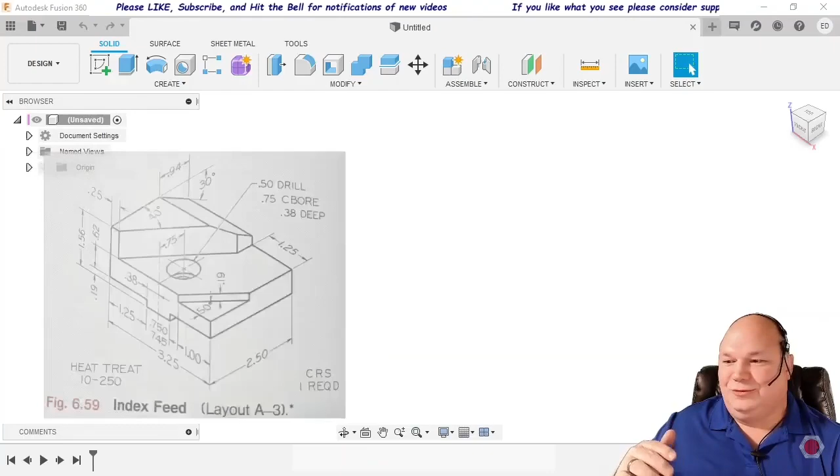And what we're going to do is we're going to make this faster. So rather than going through the items in my book in my original order, we're just going to go with Design Roulette. So, where she stops, nobody knows. We're going to ask Mo, give me a number from 1 to 10. 7. 7, okay. Make sure I've got my button ready to go.

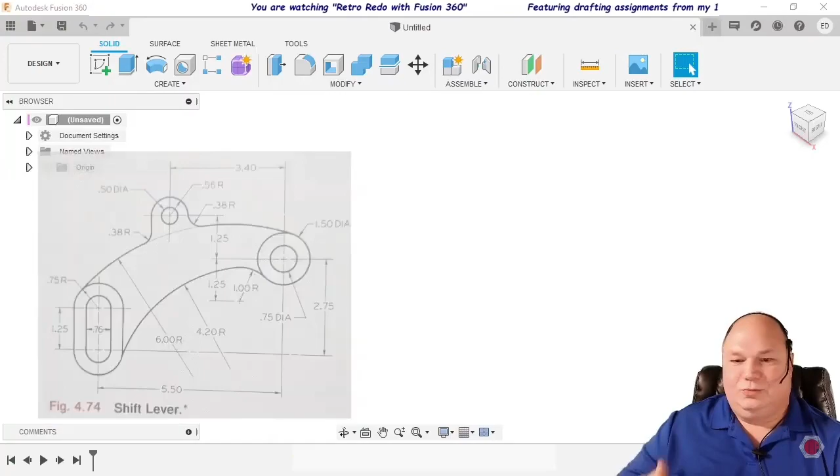As you may have already noticed, we've added the annunciation of the mouse buttons and the key presses down in the bottom of the screen for you. We can now see as we go. I use a lot of shortcut keys.

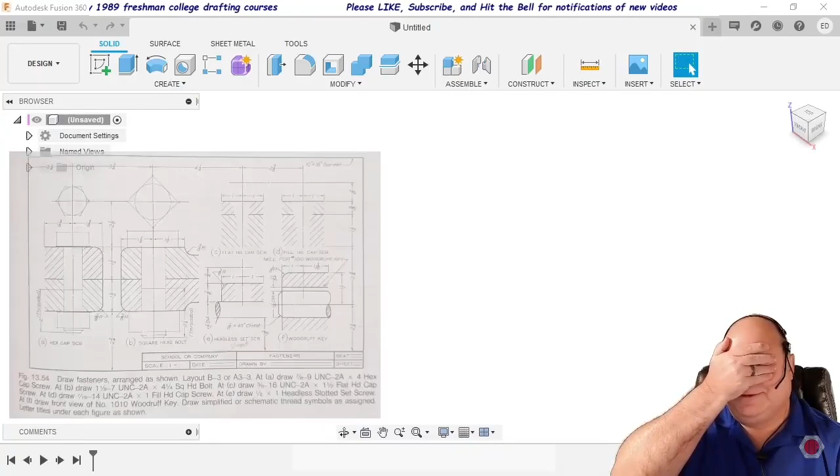Alright, here we go. Countdown 7, 6, 5, 4, 3, 2, 1. Stop it! Oh yay! Special bearing! Don't we love special bearing? Everybody loves special bearing. It's great. It's not actually. You'll see. It's actually fairly simplistic or straightforward.

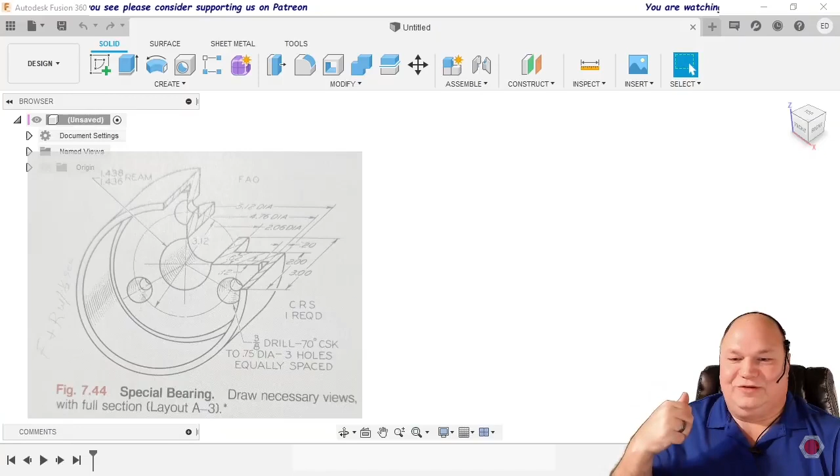Special bearing. This one is actually shown in a bit of a cross section, in what they would call a quarter section. What it allows us to do is actually just run everything off of the center line. So the first thing we want to do is, of course, save our drawing. Now we actually have some names, and this is bearing.

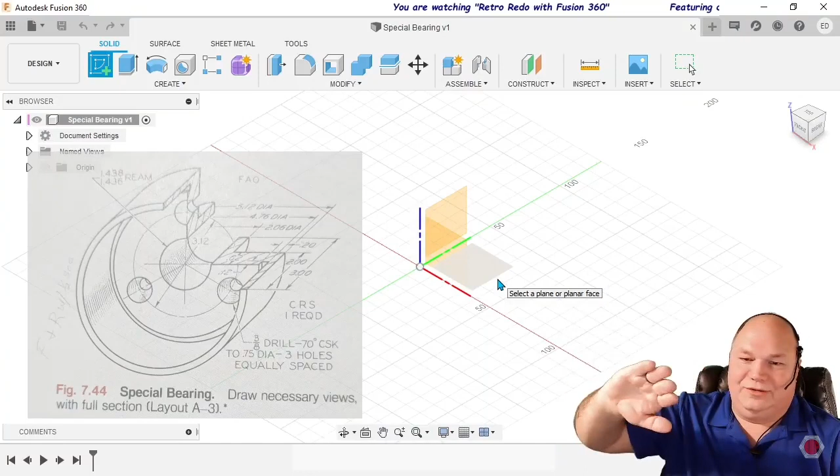And it is going to start, as all of them do, pretty much with a sketch. But I'm going to basically try and duplicate this profile here on this plane, and then just revolve it all the way around, as if it were to be magically revolved like a piece of pottery. That's cool. So we'll go to our top view,

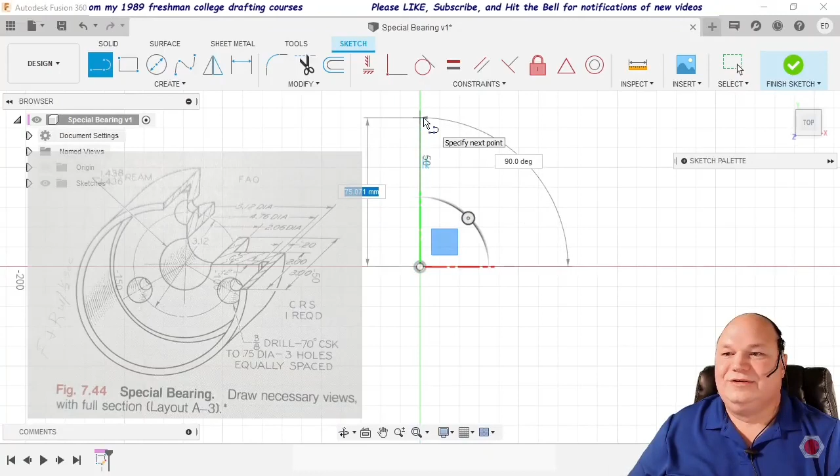and we're going to start with a construction line down the middle. You'll see it likes to snap to certain positions, like 90 degrees. So this will be our center line. And to begin with, we want that center line to be a construction line so it doesn't interfere with anything and is there just to be a reference. So that's essentially this line here, right through the middle of the object.

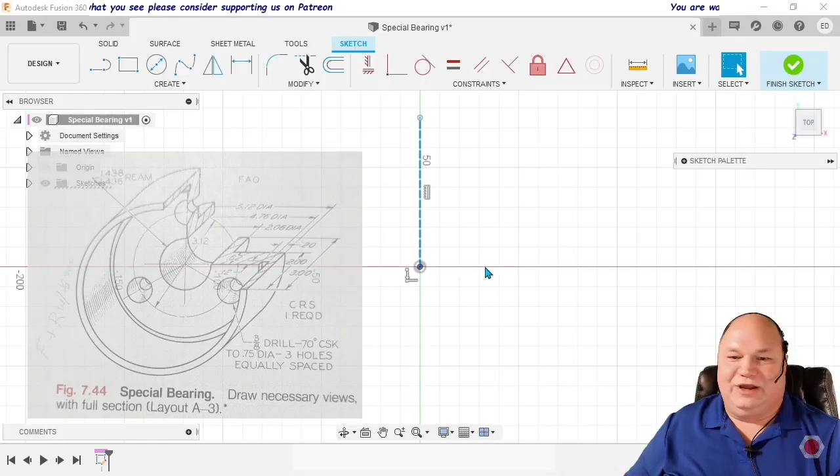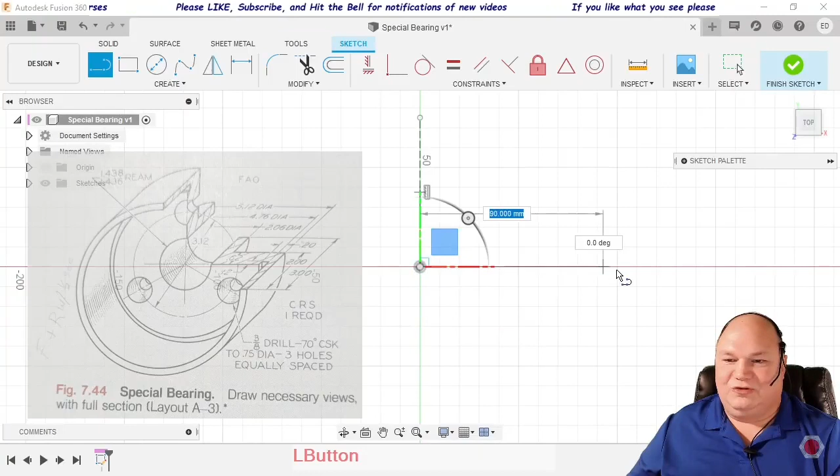And we can extend it down below, but we don't have to, since this line as a reference can be all the way across. This being our center line, and we're going to go ahead and make this horizontal line this line here on the bearing, which is kind of what it's showing here. We'll add another line that we can use for offset measurements. And again, make that a construction line.

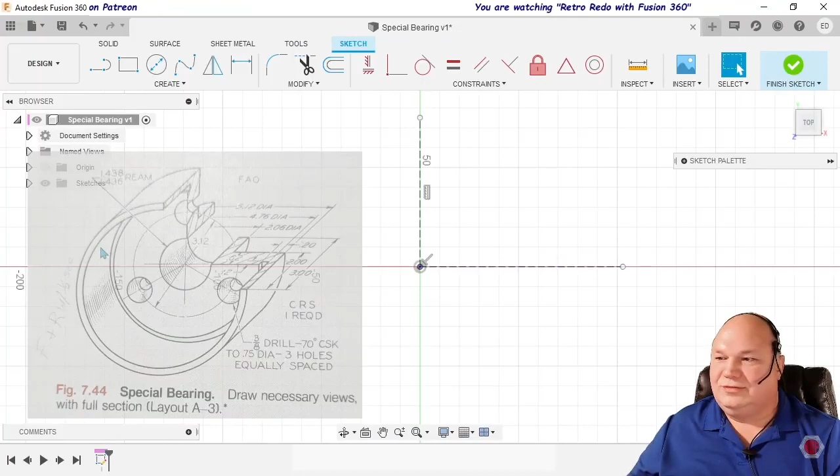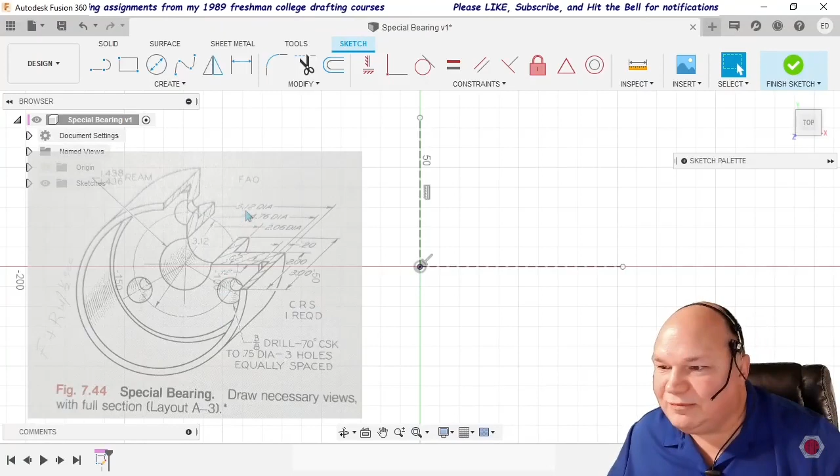And then we can start doing our various offsets from the center. So this first borehole actually has this dimension to it, which is a little hard to read. 1.438 ream to 1.436, so within 2/10,000ths of an inch. So we're actually going to work from the outside in instead, since we know the outer diameter shown here as 5.12 all the way out to this outer edge. So that's our first offset.

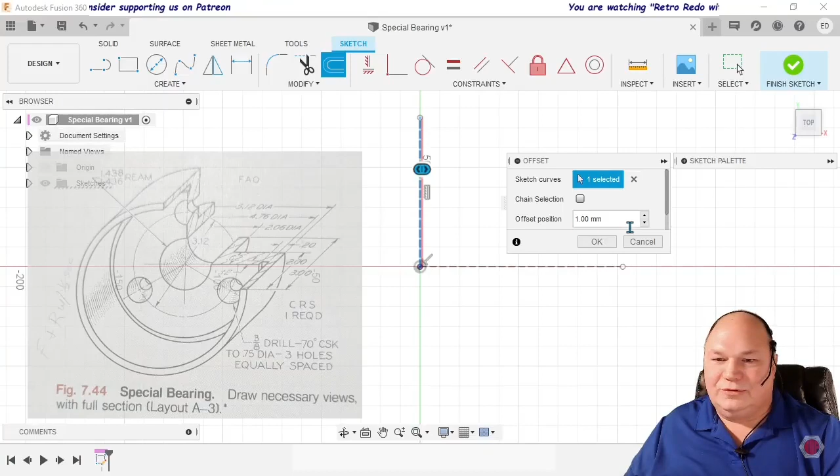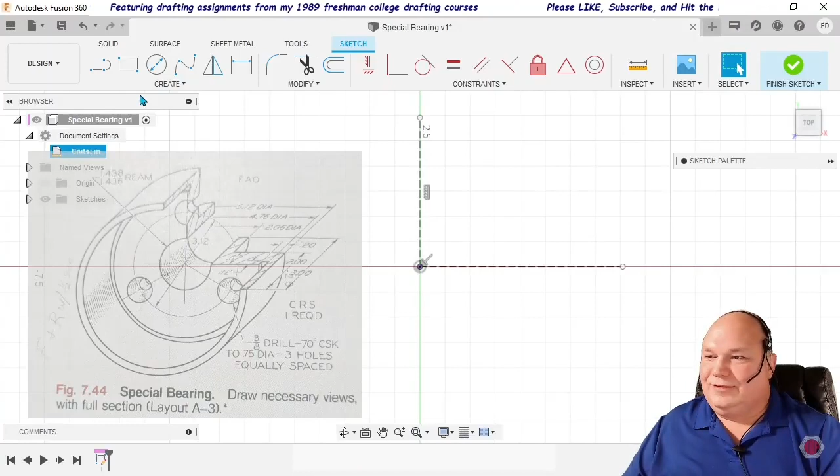And that's just this tool here. We want to offset that. I'm going to chain selection, not as if it's a circle, but a series of lines that make an outline. And this is going to be, first off, let's not be doing everything in metric when all the dimensions given are in inches. There we go. Change over to inches. There we go. Now back to our offset.

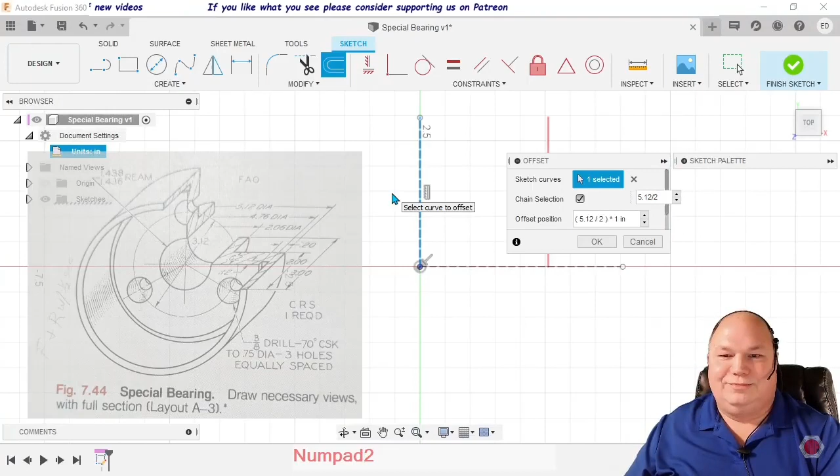We're going to offset this. It's going to be offset at 5.12. That's a diameter. And since we're doing half of that, that's a radius. And we could do the math in our head and we'd probably get it wrong. So we're going to say 5.12 divided by 2. And that helps us just put it in without having to do our own math.

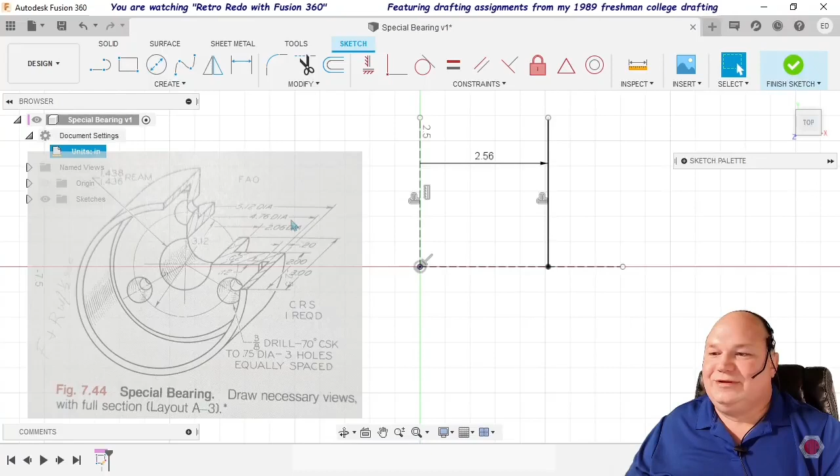I should know. 5.12, half of 512 would be 256. That should be something right off the top of my head, but it's a very convenient thing that you can just put formulas into your dimensions. So the next offset for this inner line is 4.76. So we're going to right click, repeat offset, select the object again, 4.76 over 2.

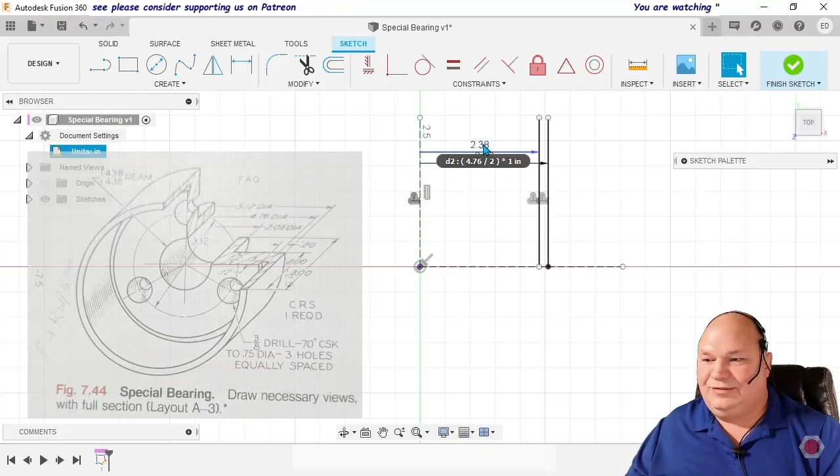Then our next number is this little notch here, which is shown in this dimension as 0.2 of an inch. So in our world, that's this current dimension, 2.38, which is the inside of that notch, minus 0.2. So that gives us the width of the notch. So again, this is all going to be a bunch of offsets by and large.

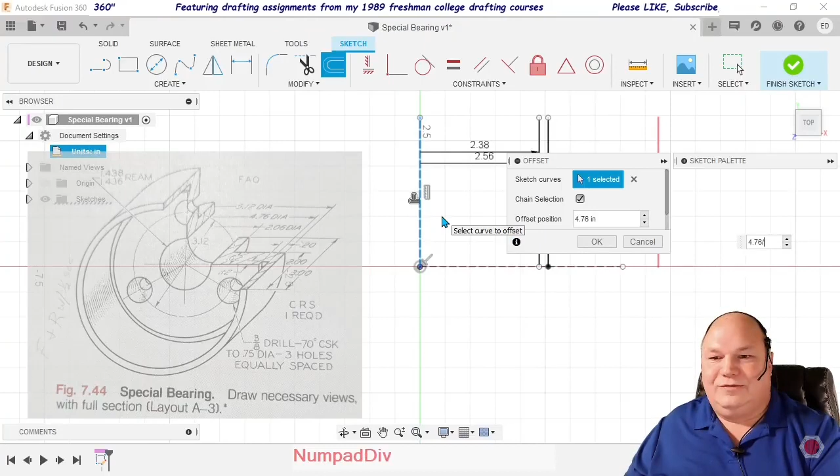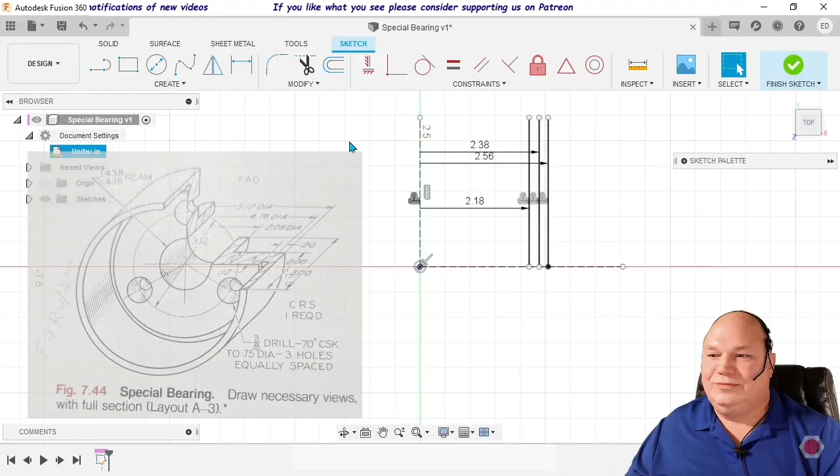And our distance is going to be the 4.76 divided by 2 minus the 0.2 width of the notch. There's our next line. And that's our notch. And then finally we have this outer edge on the other side, which shows a 2.06 diameter. So repeat the offset, 2.06 over 2. That's our inside dimension.

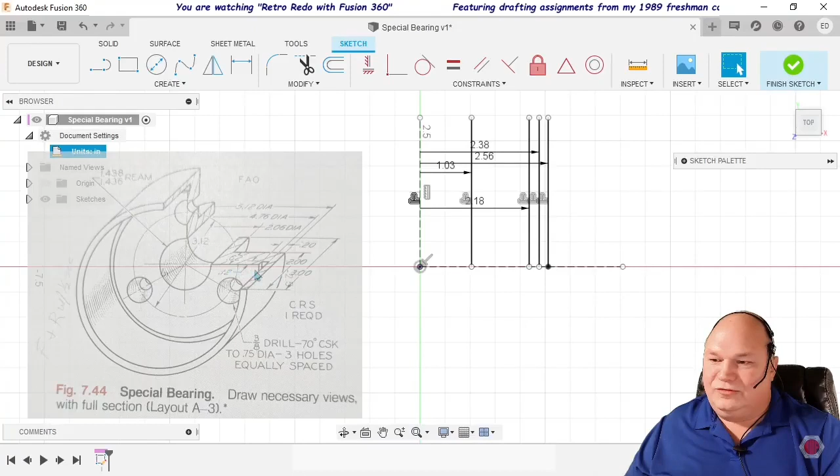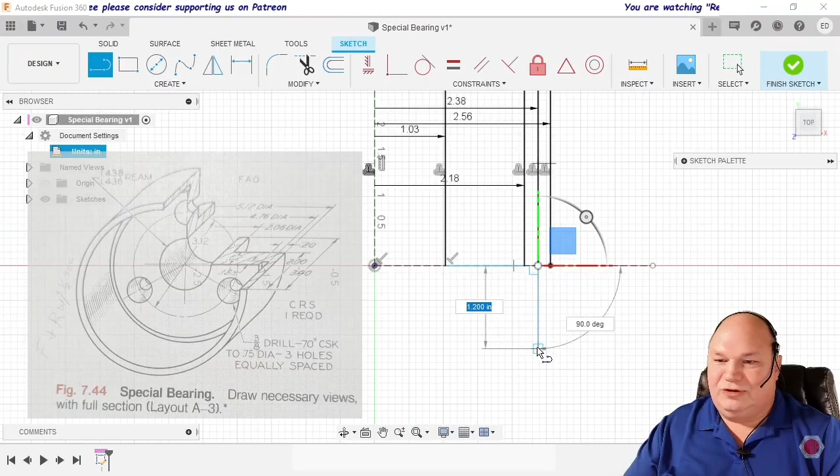So now that we have all of those lines designed as we need them, let's draw. This is our bottom line. It's across the bottom here, and it is from this innermost part to our notch. There it is. There's the line. So that line, and then let's zoom in a little. This line actually goes out to some distance forward, this line here being this inner edge.

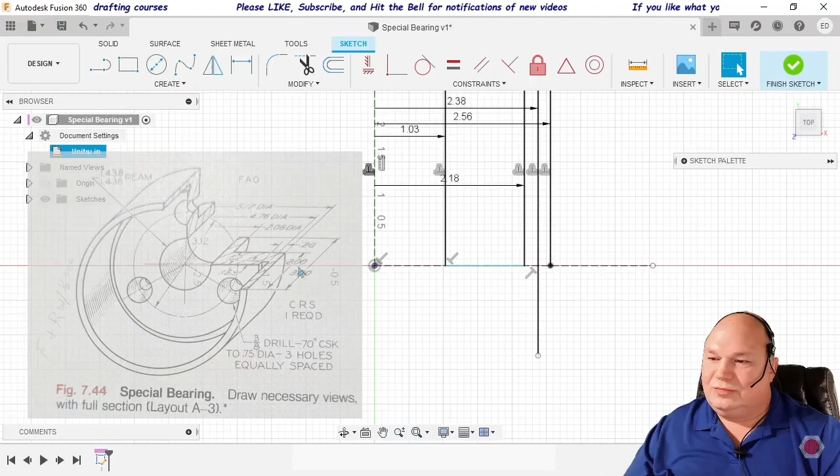And let's see, okay, they give us two dimensions. The overall dimension of 3 inches, and then this part here to 2 inches. And so to find this from here to here is this 2 inch minus this 0.62 inch. Right? So if we take this line that's 2 inches away from the edge and move it down to here, that would be 2 inches minus this 0.62. And that'll give us this point right here on the object.

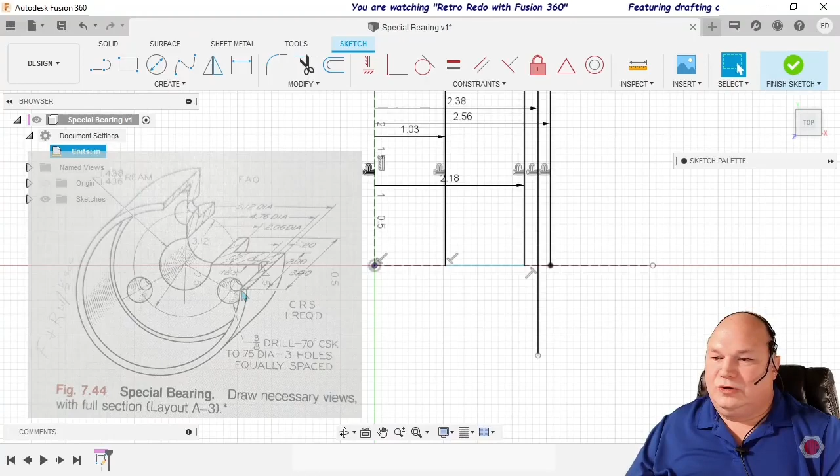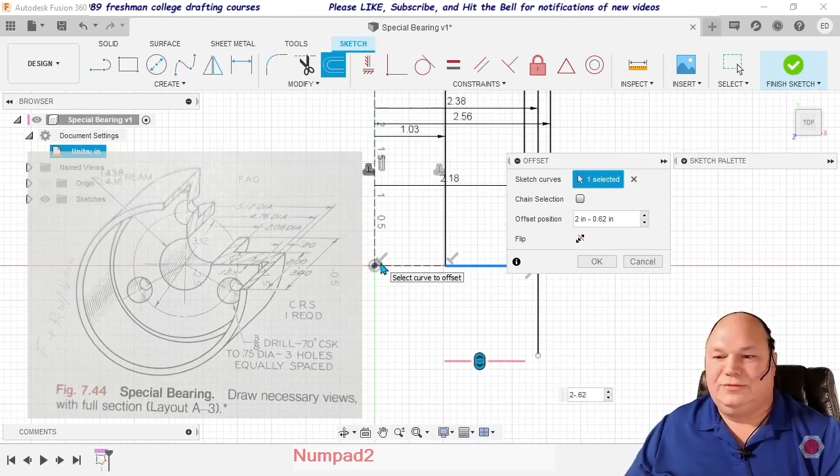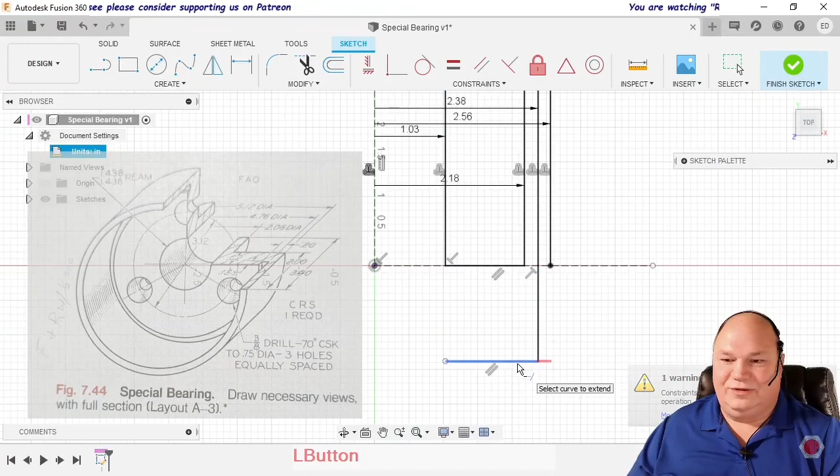So what we're going to do is do an offset from here of this line. Offset. And it's going to come out here a distance of 2 inches minus the 0.62. So 2 inches minus 0.62. Now, these lines don't line up, right? It actually needs to be further out. So what we can do is take this line and say it needs to be extended to the next line that it would intersect with. And we can do that with that and those. And we begin to get this edge right here. So we got that edge.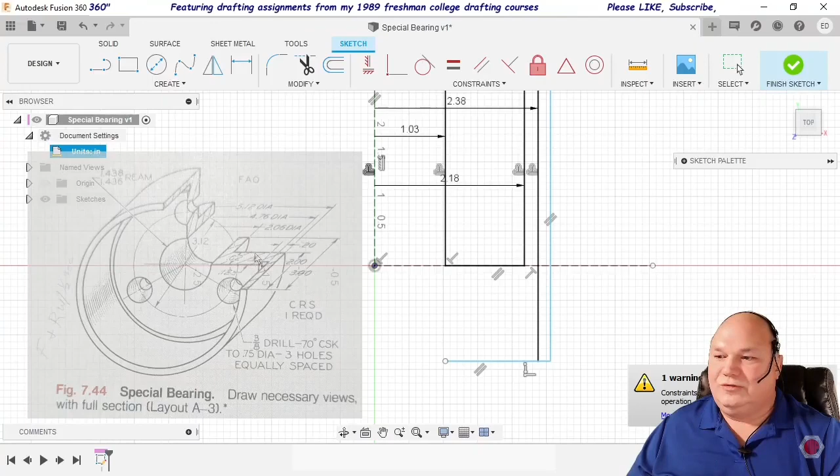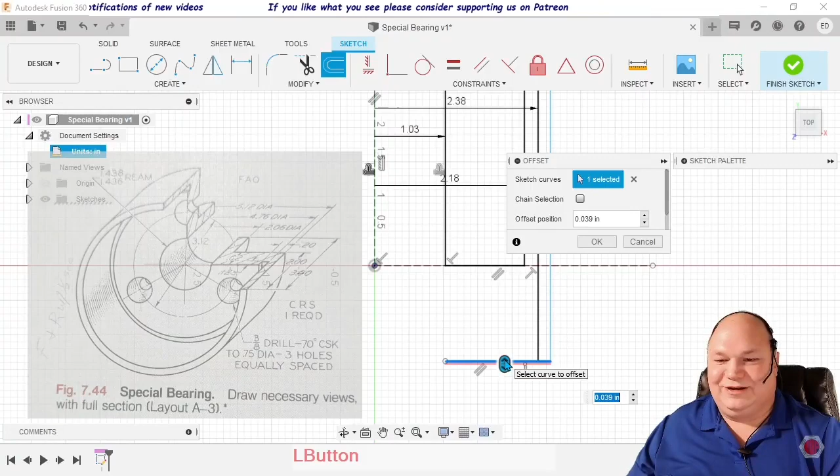Now that we have this front bit right here, we know there's going to be this back line that is 2 inches away from the front. So again with the offsets. Now, interestingly, it won't let you offset an offset line, but it will let you offset a line. That was the chain function where it picks all the lines that are connected. We didn't really need that. So this is going to be in the opposite direction, 2 inches. So now we're beginning to get our shape.

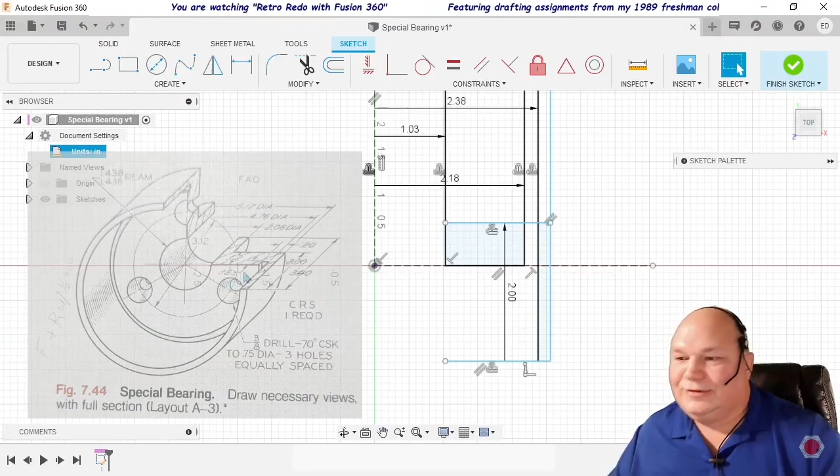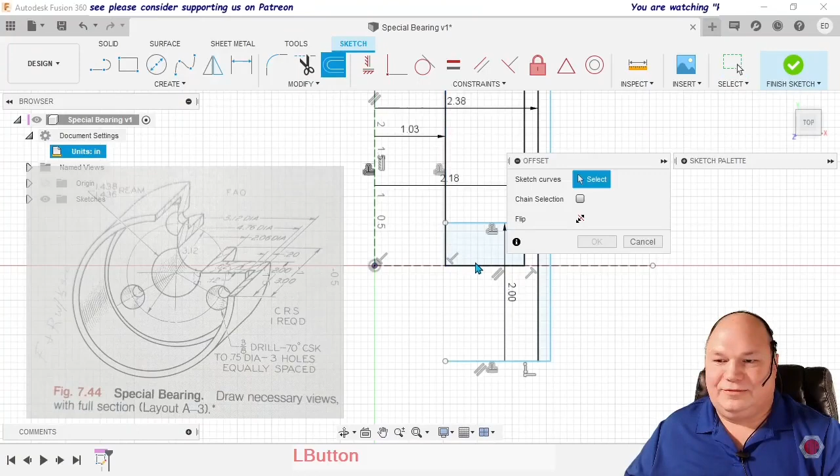We need to find out what's this depth right here. What's the depth of this notch? It is 0.18, or no, 0.12 rather. We can make this bigger. We don't have to keep staring at it like that. There we go, 0.12. That's the one. So it's 0.12 of an inch from this line up. So let's do offset of this line, negative 0.12. The only reason it's negative is because it's above the center line versus below the center line.

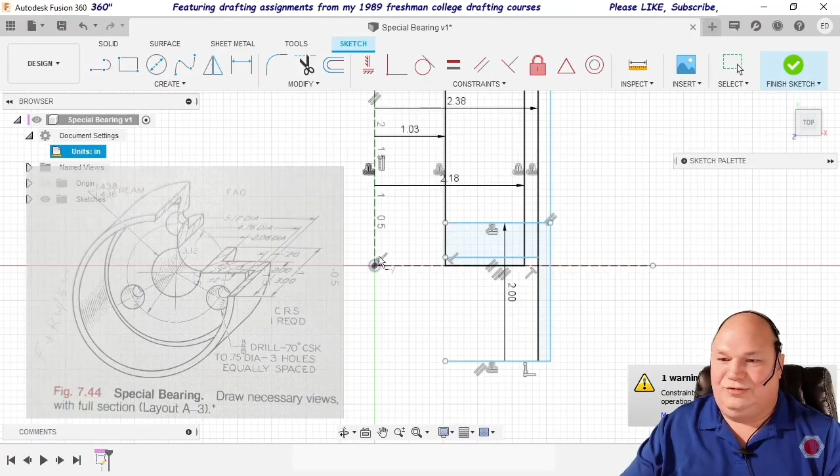And then this line will actually extend across. And then we begin to see our shape. Here's this edge. There's this edge here. This little part before the notch, and then all of that. Now all we're really missing is this little tang bit right here. So we need to find out how far that is from the front edge. And let's see. Oh, that's the 2.06. So really now we need to put this line in here, which is the center bore.

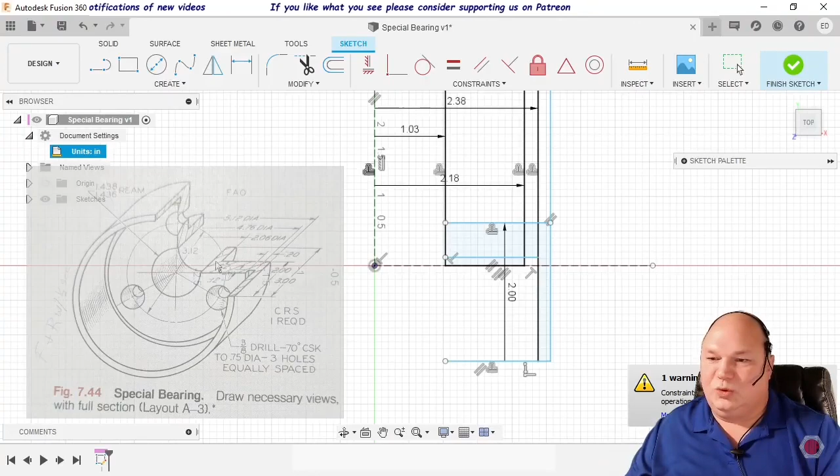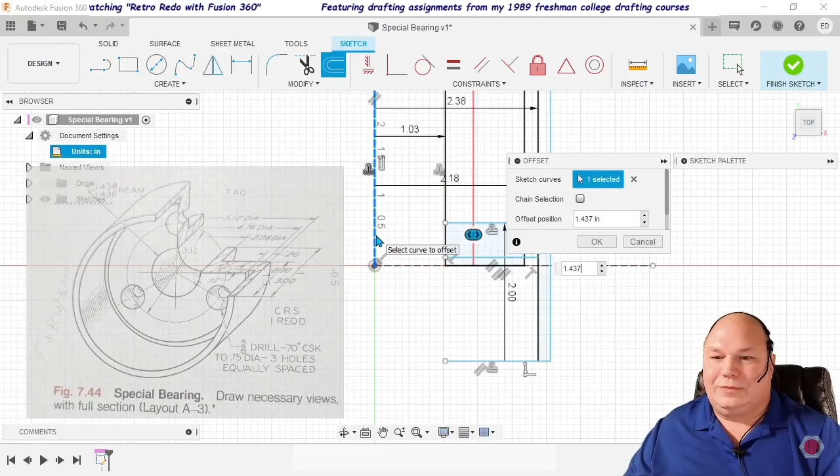And the center bore, 1.438 to 1.436, so the middle of that is 1.437. So we'll use that. 1.437. And again, over 2, because it's radius versus a diameter. And then, let's see, we need this bottom line to extend. So if we extend that line, you see it highlights red where it's about to do.

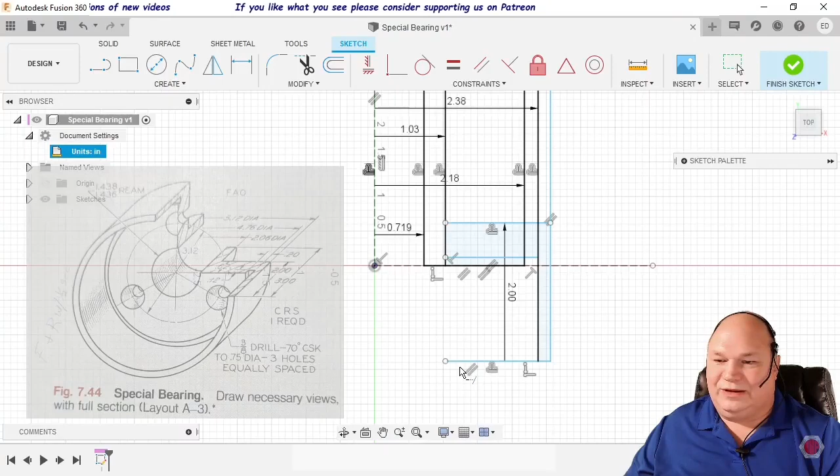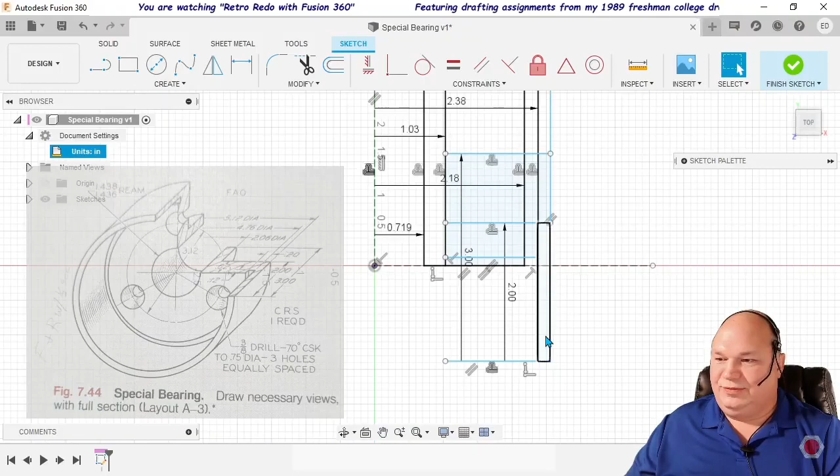And then we need this final top line here that is 3 inches from the bottom. Offset from that. We can drag it up if we want to. It's easier just to put in the numbers, really. And of course, again, we're going up, so we need to make it -3. Now we have most of our shape. We just have this extra area. So now we're going to go back in and trim so that the only lines we have are the lines that are involved in the actual design.

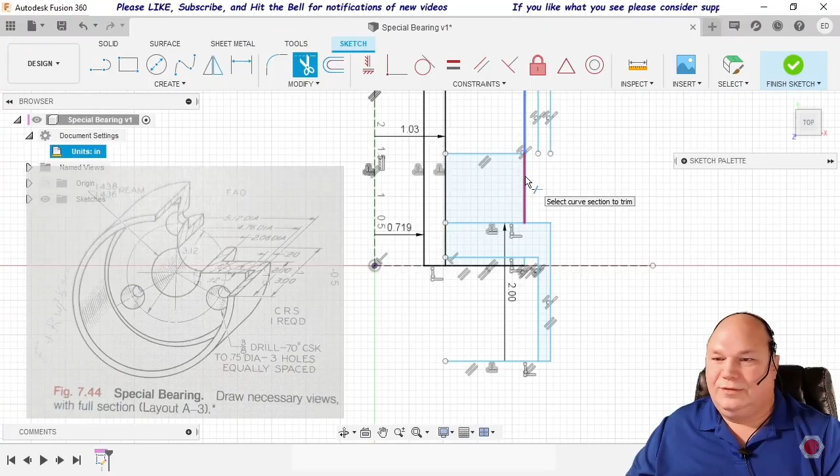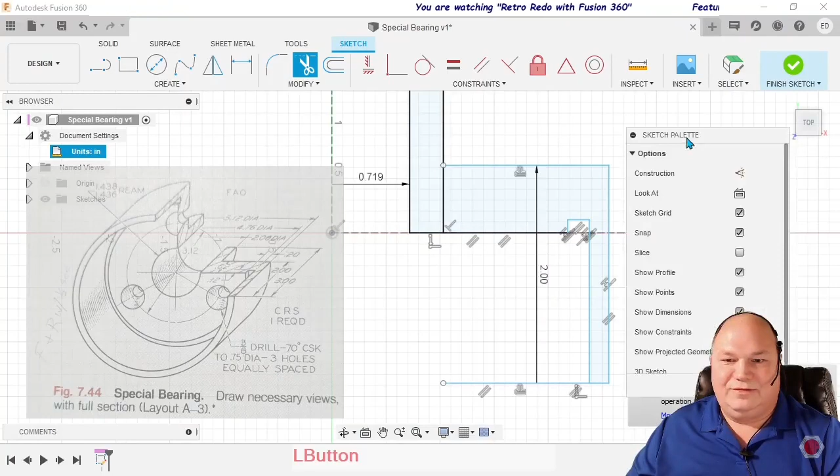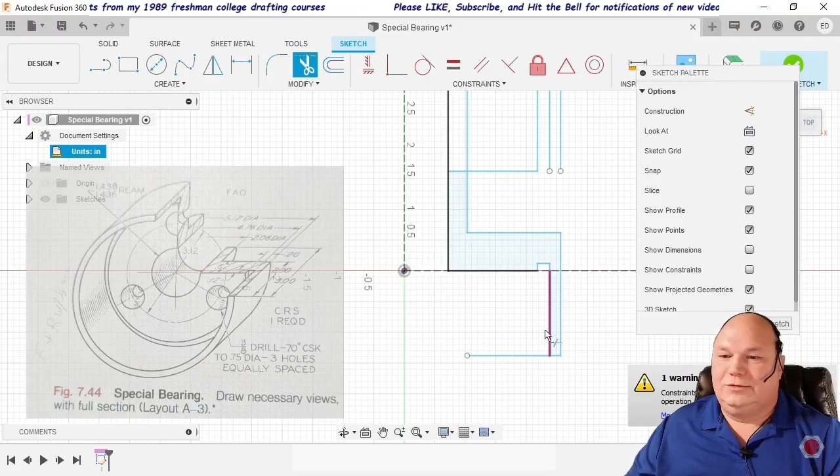And that goes, and then we actually need to extend this guy across, and then trim that piece in the middle. If we expand our sketch palette, we can hide some of these extra things like dimensions and constraints, and get a clearer view of our object. There's a few extraneous lines. I suppose we could trim that one out. This one here. And now this shape is, whoops, didn't mean to do that.

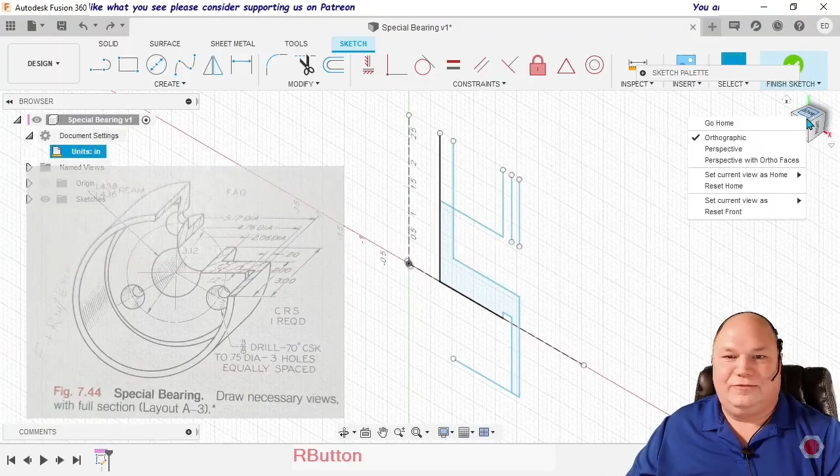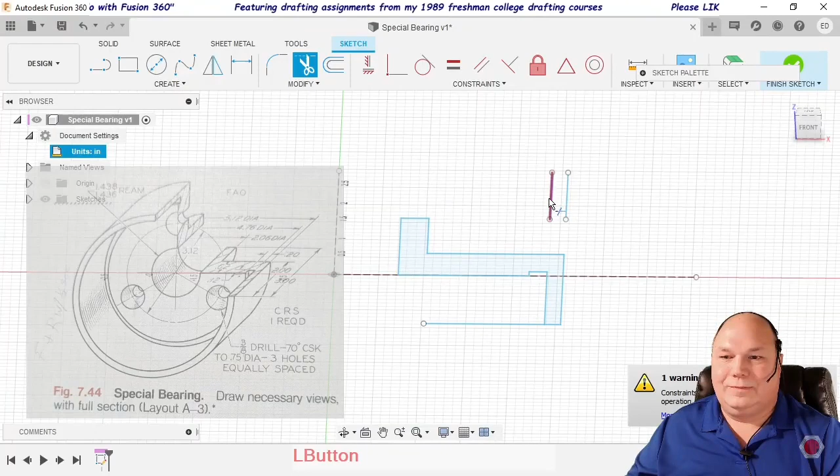So this shape that is shaded in blue is the shape shown here, right? Now we've got that shape. If we look at it from, there we go, the same kind of direction, you'll see it looks pretty much correct, right? We can do some little checks before we do the rounding off. So first off, let's finish up trimming it up. So this looks relatively narrower than this, correct?

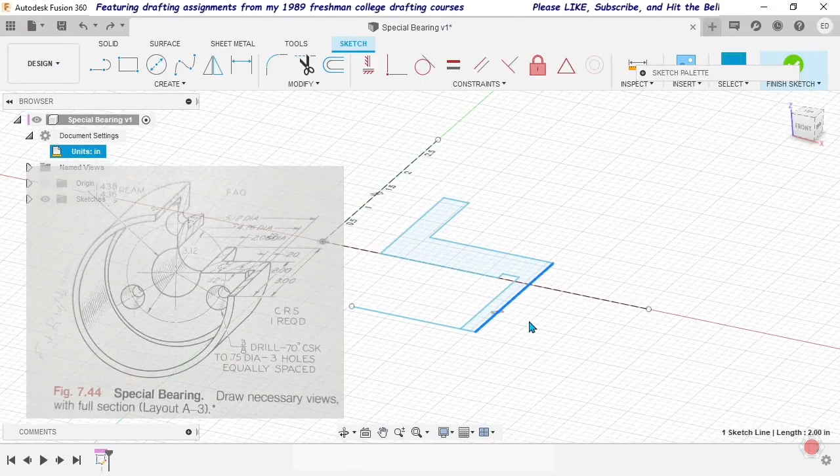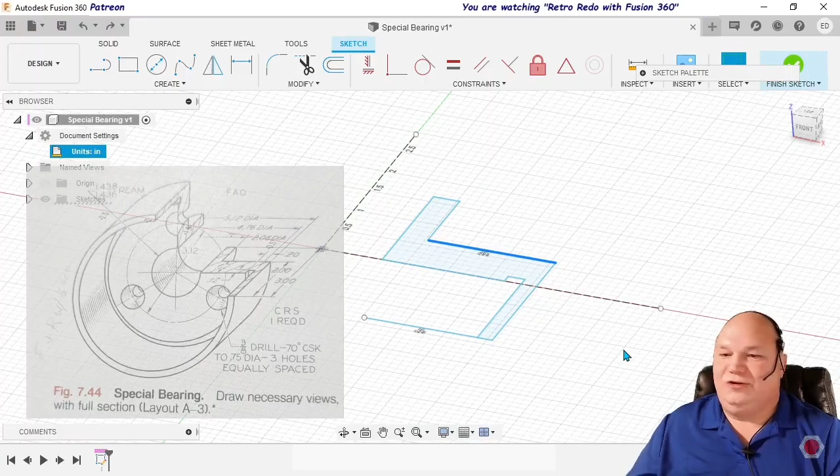But we can do some things. First off, let me get my big body out the way, and we can start clicking on some lines. So that's a 2-inch line, and that's a 2-inch line, sure enough. This extra bit should be a 1-inch line for a total of 3. That's true. Well, let's roll it out and see what we get first, and then we will come back and we can edit the layout or the original drawing later, and you'll see one of the advantages of having this kind of parametric design.

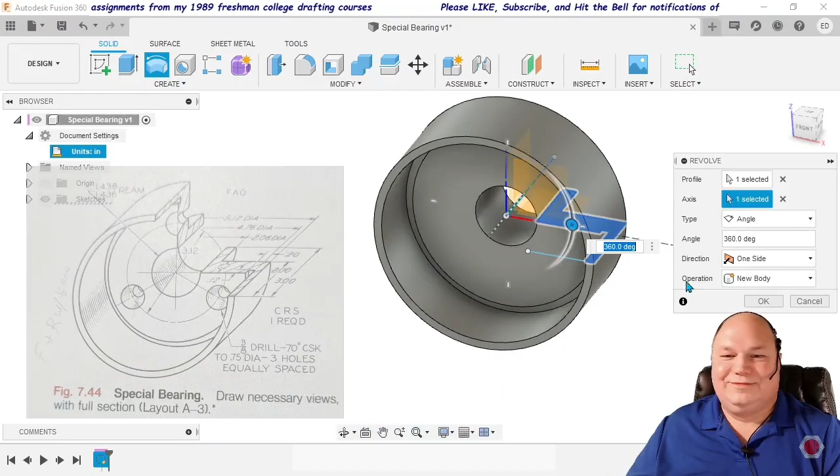So if we just simply, well, first off we have to finish the sketch. We've got this profile highlighted. You can do a revolve about this axis, and boom, there's your object. Well, almost the object, correct? There's a couple of things missing. First off, these little screw holes.

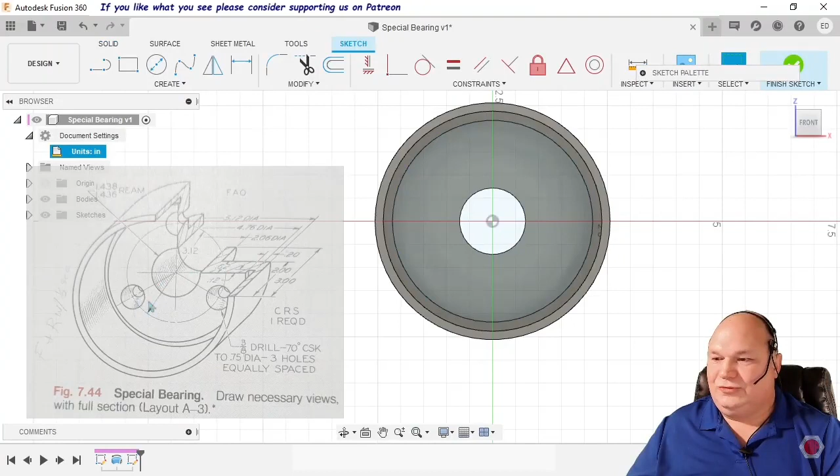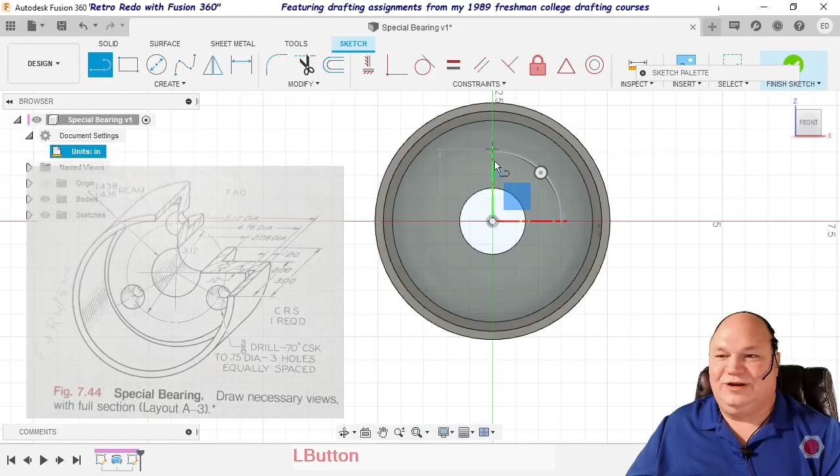Now, it's pretty convenient, easy to do in Fusion. We'll just drop a sketch right on that surface. It says the screw holes are at 3.12 inches from the center line. So 3.12 is the diameter. So again, 3.12 over 2. Now we have a length. Make sure it's at 90 degrees. Now we have a line that gives us a point. And the reason I do that is so that when we finish the sketch, we have that one endpoint that we can highlight and say, let's drill a hole.

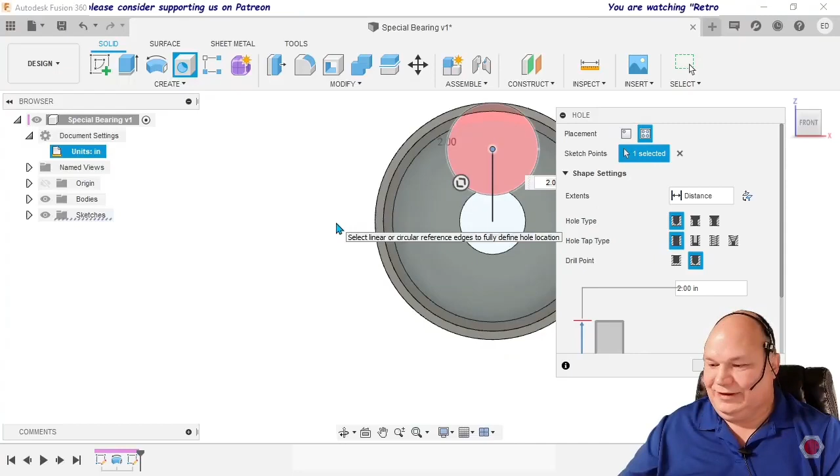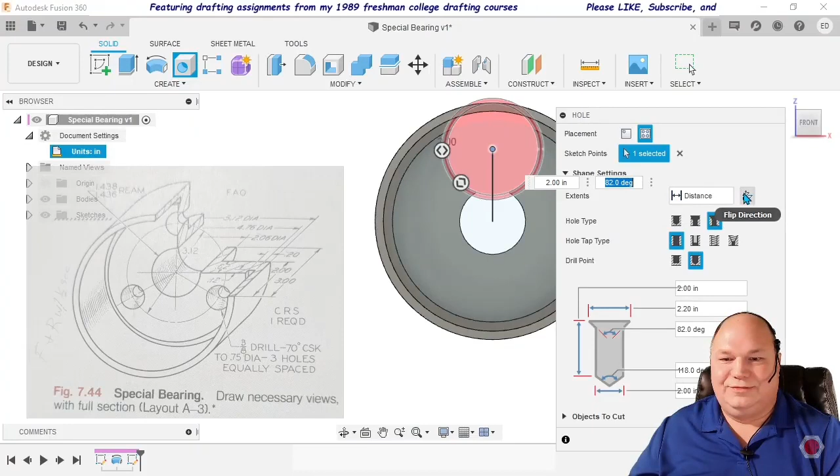Now we got all these hole specifications. As you'll notice over here, we actually have some details about our hole. It's 3/8 of an inch drill with a 70-degree countersink to a 3/4 inch diameter, 3 holes. So what that's saying, and this is showing in the little diagram here, we want a countersunk hole. We want the top diameter here to be 0.75 of an inch. We want the degrees to be 70.

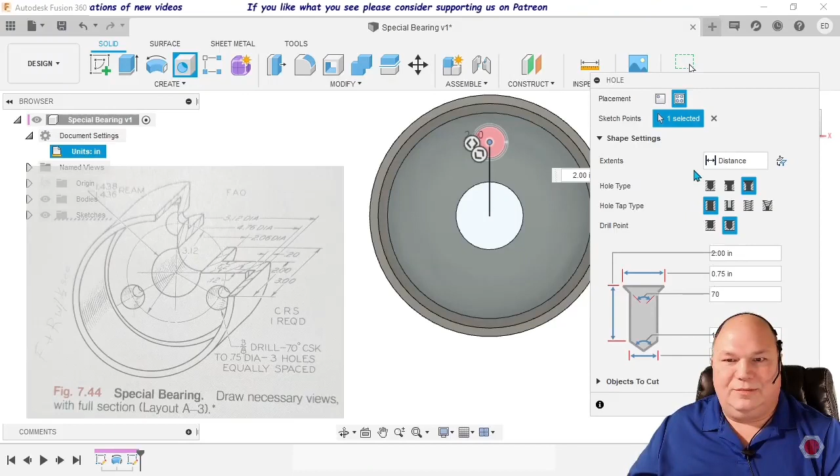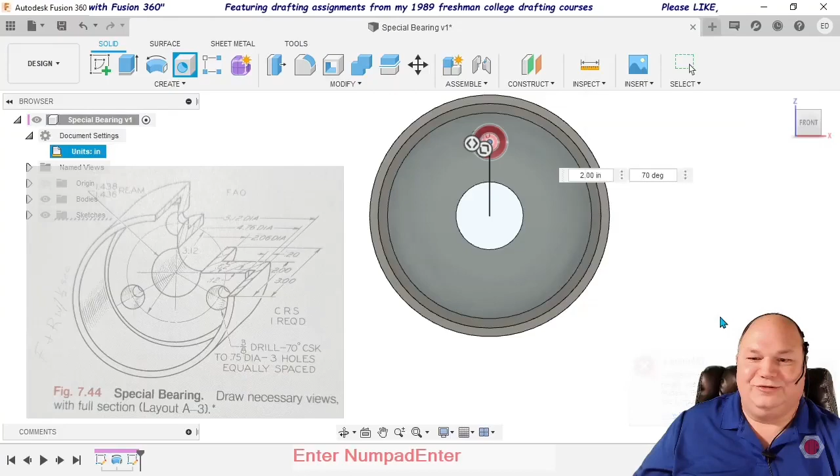And the length I'm not too worried about because it's just going to go through the whole thing. We're not going to have this counterbore on the bottom. The inside diameter, which is 3/8 of an inch. So I don't have to worry about knowing what that is in decimal. We'll just put in 3 times 1/8 of an inch. Now we've got this hole, and it's already got all of the detail of the countersink. Correct? Now all we need to do is make the other 2. And conveniently, that's really easy to do.

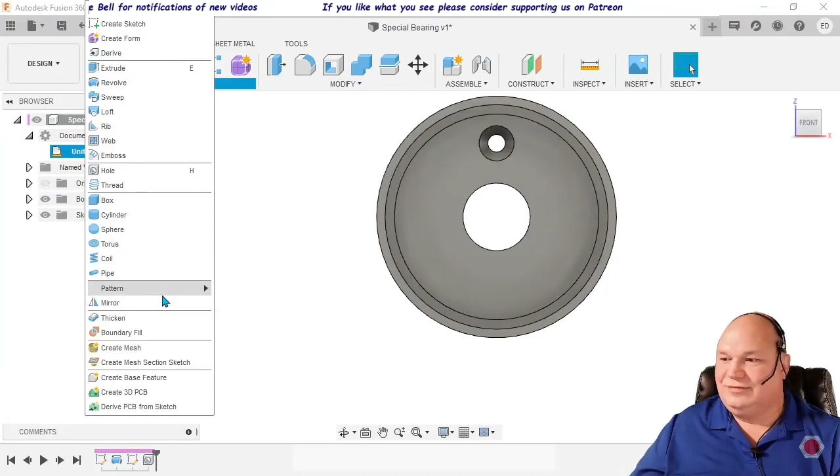Once we have that feature, we can say we want to create a circular pattern, and we want that to be of features. We select the feature. It says you want to do a full circle. The axis is going to be this green axis in the middle. I see 3 holes. All right. So is it supposed to have 4 holes? No, it's not.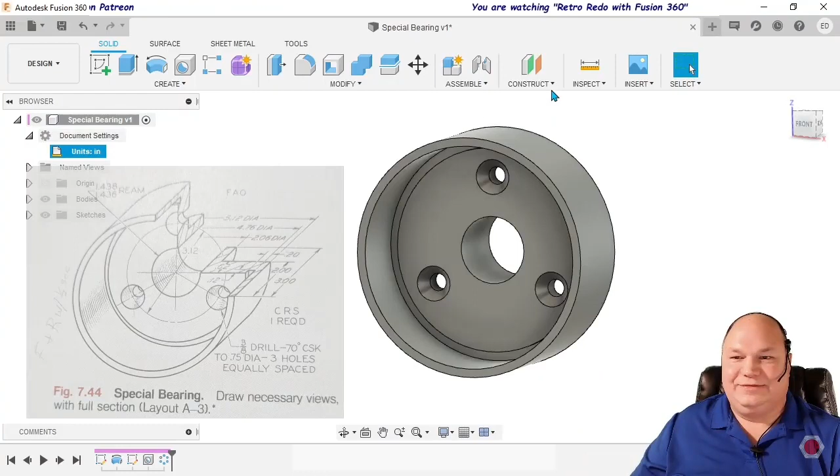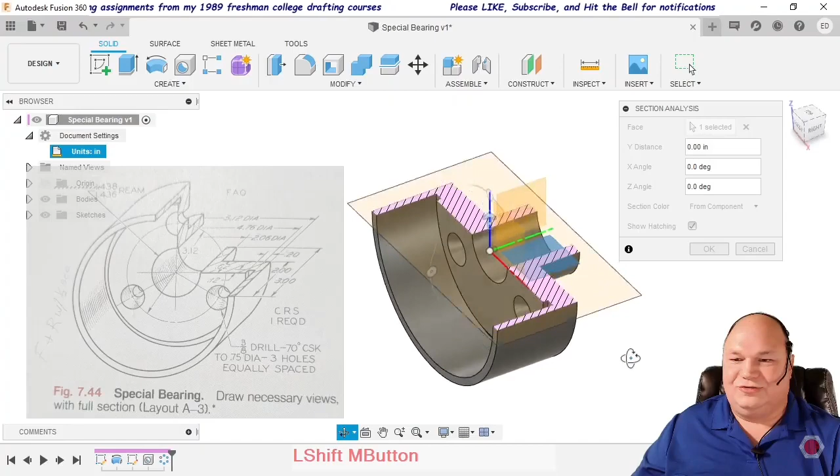So the way this was drawn was in this quarter section where they took out a 1/4 pie piece. Now, I haven't seen how to do that directly in Fusion, but you do have the ability to do what is called a section analysis, which allows you to put a cut section plane on this plane here, and you can see it actually shows that same profile. I don't know why it doesn't directly do a quarter section, but you can change the section analysis to be the other plane if you wanted to. And now it looks correct.

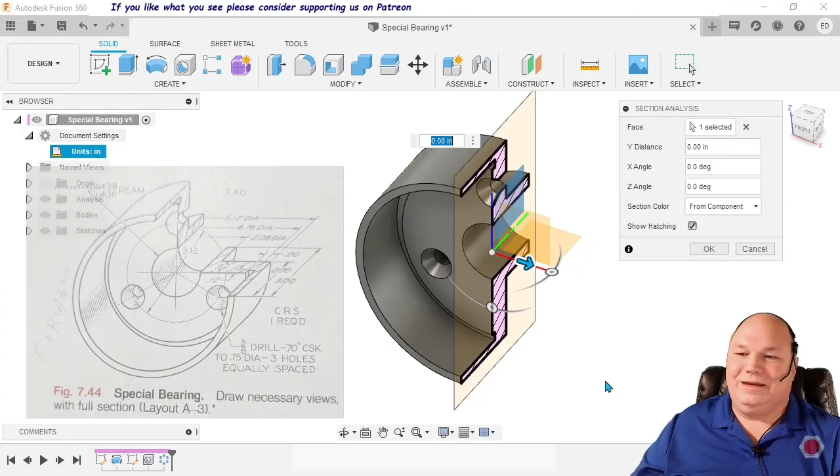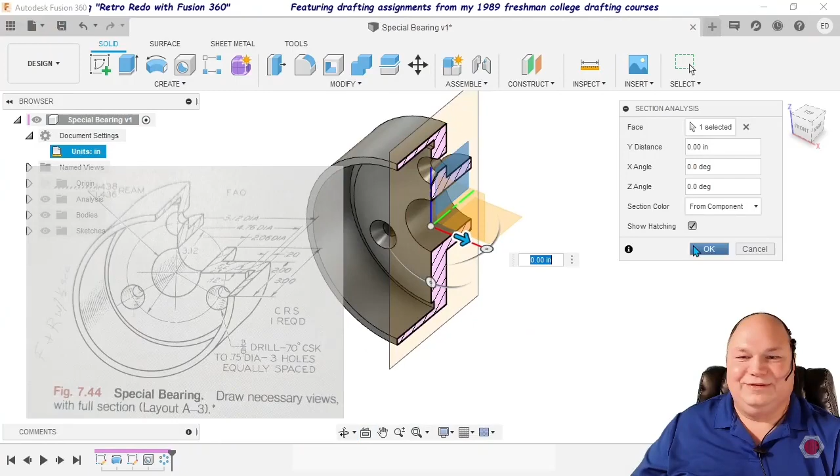See, it was just a distortion of the drawing, but when it's in this view, now it looks correctly proportional. I'll go home. You see what I'm saying? It didn't quite look correct when I was drawing it, but in here it does. There we go! Yay!